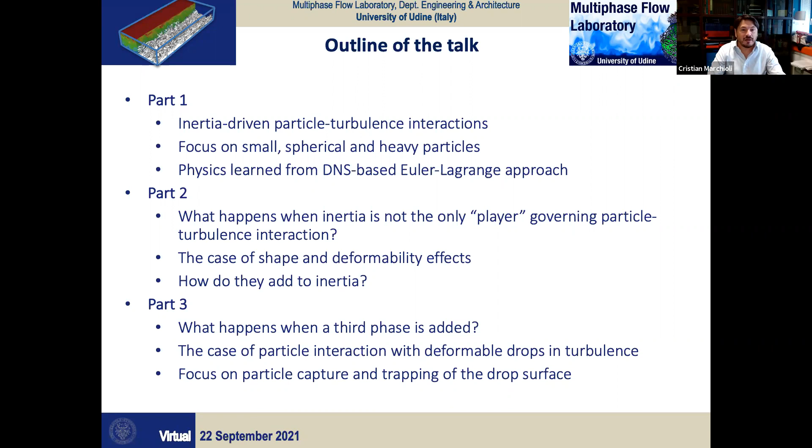Okay, so let's start from part one: physics of inertia-driven particle turbulence interactions. I would like to start by showing you this picture, which you probably know—a very well-known result for those who work on dispersed flows. I'd like to draw your attention to this picture here.

Summer is almost over, but perhaps this picture reminds you of the bottom of a swimming pool on a nice summer day. Unfortunately, it's not like that. This is a snapshot taken from a direct numerical simulation of homogeneous isotropic turbulence.

In this case, the computational domain is a cube that is not bounded by walls, within which you have a turbulent flow. This is just a 2D snapshot taken from this flow in which small particles have been added. Now, in a turbulent flow, we know that there is a wide range of space and time scales.

The smallest scales are the Kolmogorov ones. In this case, the particles that are injected into the flow are significantly smaller than the Kolmogorov scale. This allows what I will present later, the treatment of particles as points. But anyway,

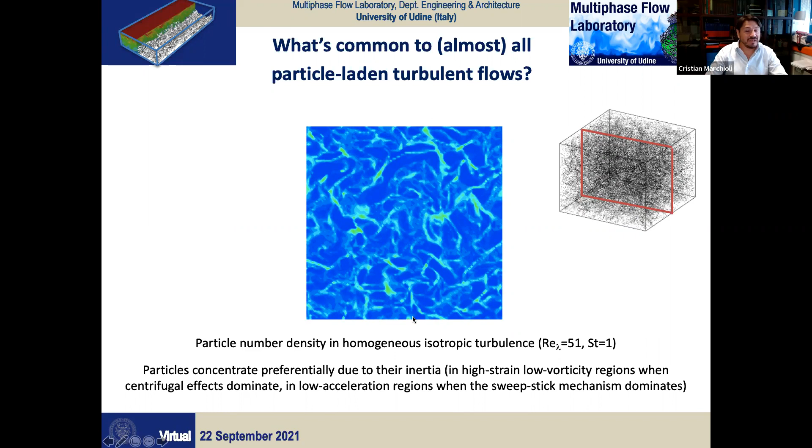Now, in this case, the flow, of course, is a bit more complicated than before because it is bounded by walls. So the wall-normal direction is now non-isotropic and non-homogeneous, all right?

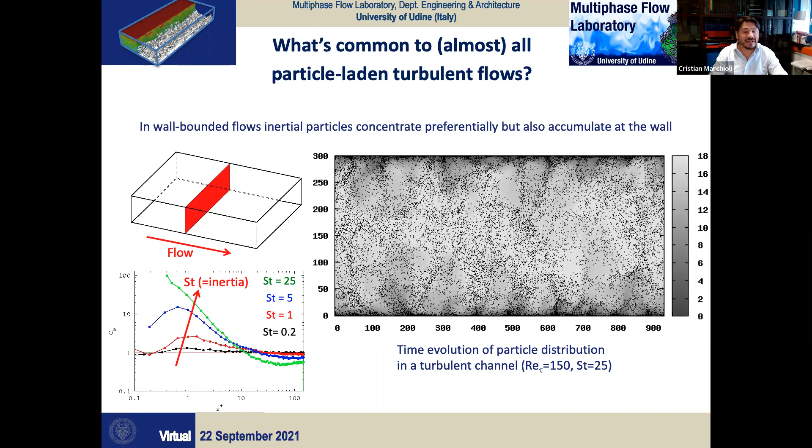Now, without entering too much into detail, we see that there seems to be common macroscopic features that can be identified for particle behavior in the turbulent flow. Now, what is determining this macroscopic behavior more or less in all these kinds of flows?

I could have made more examples, for instance, a particle-laden turbulent jet, and we would have observed the same type of behavior. Well, the simple answer is that in all these flows, particles do not follow precisely the fluid streamlines, but rather deviate from them.

In the examples I've shown you so far, the only source of bias is particle inertia. The effect of particle inertia can be quantified by the particle Stokes number, usually defined as the ratio of the particle relaxation time and some characteristic time scale of the flow. This particle relaxation time is the time it takes for the particle to adapt to any perturbation induced into its motion by the underlying turbulent flow.

Depending on the Stokes number, we can have different kinds of interaction between particles and turbulent structures. If the Stokes number is very small, ideally going to zero, particles have zero inertia and behave as fluid tracers, following streamlines neatly. In this case, one would not observe the non-uniform distribution in space I mentioned before—particles remain uniformly distributed, behaving like an incompressible phase.

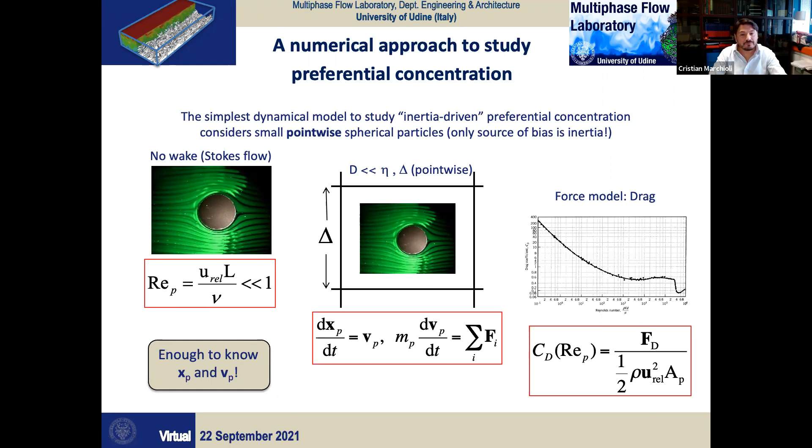For instance, the physics that we can learn can be understood using an Eulerian-Lagrangian approach, as we did. This slide is meant to tell you that our approach solves for the Navier-Stokes equation for turbulence using direct numerical simulation of these equations, coupled with this Lagrangian particle tracking, which I just presented to you.

Another important point is that the results I will show you refer to a case in which the dispersed flow is in the dilute regime. So the particle mass fraction and volume fraction are always considered to be low. In this case, if we stick to this limit, we can neglect the effect of particles on turbulence, and concentrate on the effect turbulence has on particle dispersion. So I will refer mostly to results obtained in the one-way coupling regime, where only the effect of turbulence on particles is taken care of, and the feedback of particles on turbulence is for the time being neglected.

And clearly we can focus a lot on the simplest case of spherical particles, but we also did some simulations with rigid fibers, so something of these kinds of shapes, a prolate ellipsoid rather than a simple sphere. But in general, I will focus on non-spherical particle effects later on.

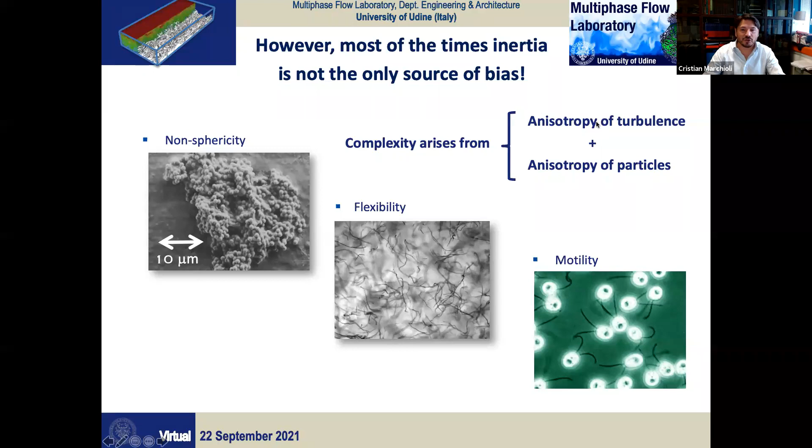Now, that of course makes the situation more complex, because particles are also anisotropic in this case, and this anisotropy adds to that of turbulence. That implies that if we want to still use the dynamical approach and model that I presented, we need to introduce additional functionalities in it.

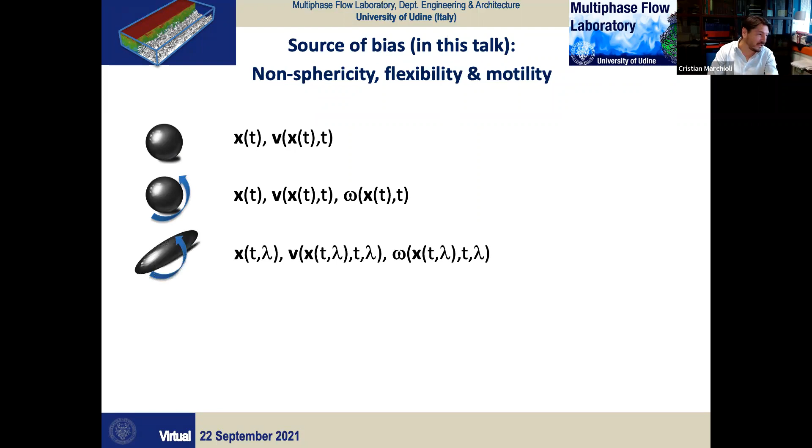Because if we have a small sphere, it is enough to know trajectory and velocity as a function of time. But for some applications, we might be interested also in rotation of the particle, so we need to investigate the rotational dynamics and need an equation for it. If the particle is non-spherical, let's assume this non-sphericity can be represented by just the aspect ratio lambda of the particle, then we need to know all these quantities as a function of the aspect ratio too. There will be an influence.

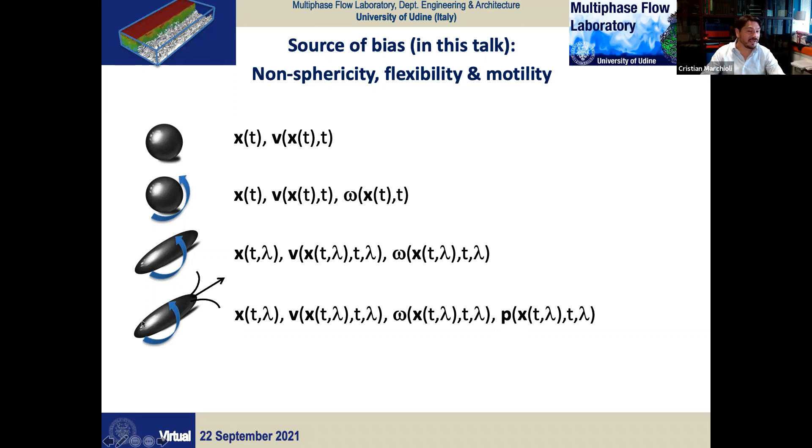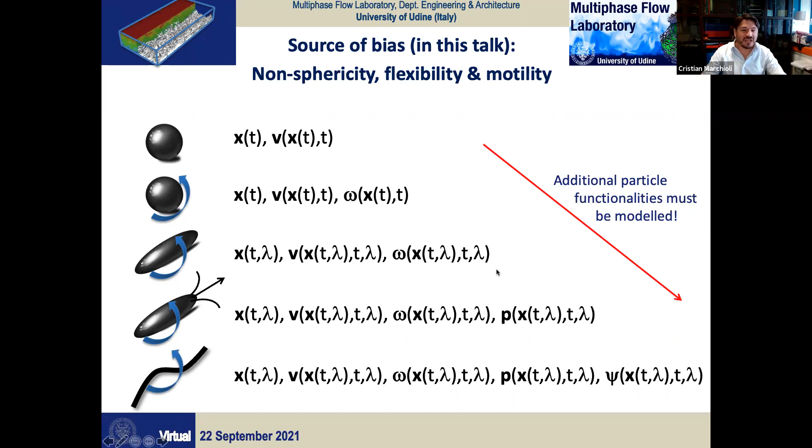In case the particle is non-spherical and maybe also active, so it can move within the flow, we must know also the time behavior of the orientation, indicated by this vector P. So P represents the instantaneous orientation of the particle inside the flow. And if the particle is deformable, then we need additional constraints for the particles. So in general, we need to make our model more and more complex.

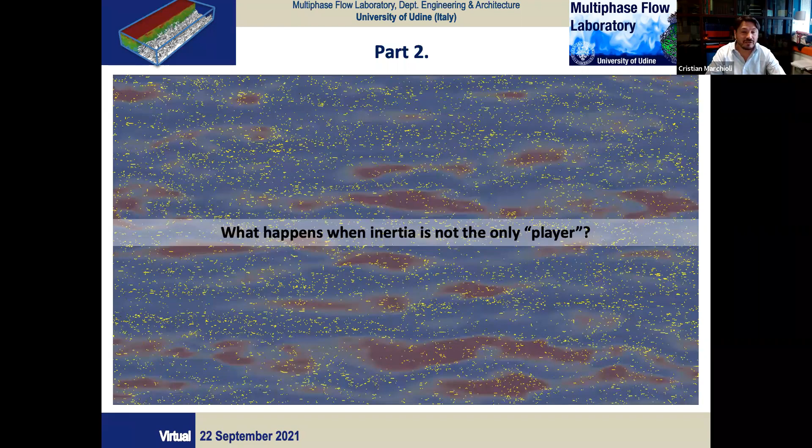Now let's see what happens if we do that, if we complicate the situation. So what happens when inertia is not the only player that determines particle interaction and distribution within turbulence. Now I would like to show you one case which we investigated a few years ago.

This is the work of Diego Dotto, on the dispersion of small flexible fibers in a turbulent channel flow. In this case, fibers are still inertial because they are heavier than the fluid, but they are also non-spherical and flexible, meaning they can deform under the action of turbulence. We wanted to investigate the process of particle dispersion, preferential concentration and wall accumulation in the presence of these additional sources of bias.

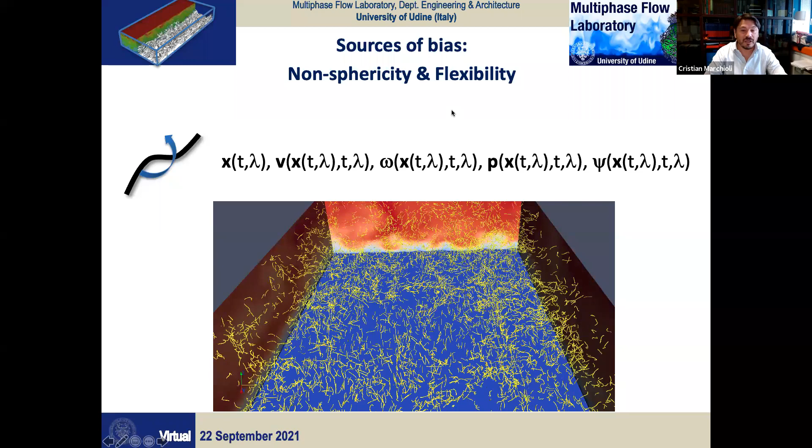The first motivation came from pulp and paper making, because cellulose fibers used for paper and pulp production are clearly non-uniform. But I would say the type of fibers that we have investigated are closer to environmental applications.

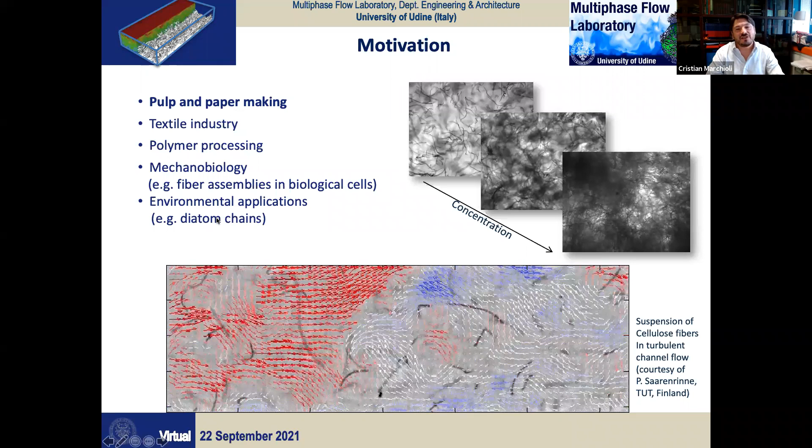The reason for investigating this problem was also related to some methodological aspects, because at that time what people did was either simulate simple rigid, non-deformable fibers in a complex turbulent flow like a turbulent channel, or complex flexible fibers in simple shear flow. Here I'm showing some examples in which the flow is 2D or just characterized by a linear shear.

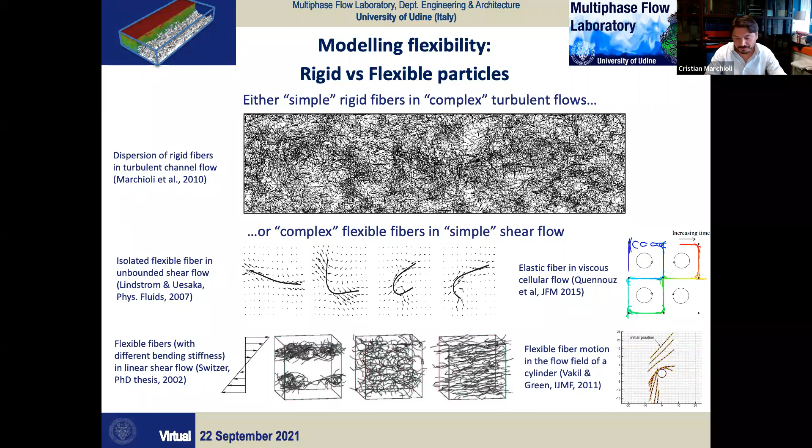So what was missing was the complexity of a flexible fiber coupled with the complexity of a turbulent wall-bounded flow. We decided to tackle this problem, and from the modeling point of view, we built our flexible fiber as a chain of small segments. It could have been spheres too, connected by ball and socket joints. This is the so-called bead model, applied many times in the literature.

Here I'm providing some reference papers in which this method has been applied for the first time. The main point is that we can decompose our fiber into many small segments, or spheres, and for each of these segments we can solve Euler's first and second law.

This is exactly the equation I showed you before, the force balance, in which, in addition to the drag force acting on the individual element of the fiber, we need to take into account the constraint forces, which I indicate here as X, induced on our element by the neighboring ones through the constraints. And of course we need an equation for the rotation of each of these elements.

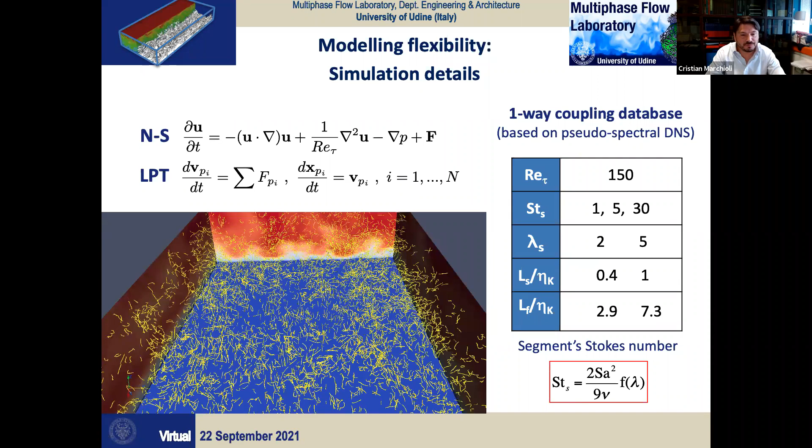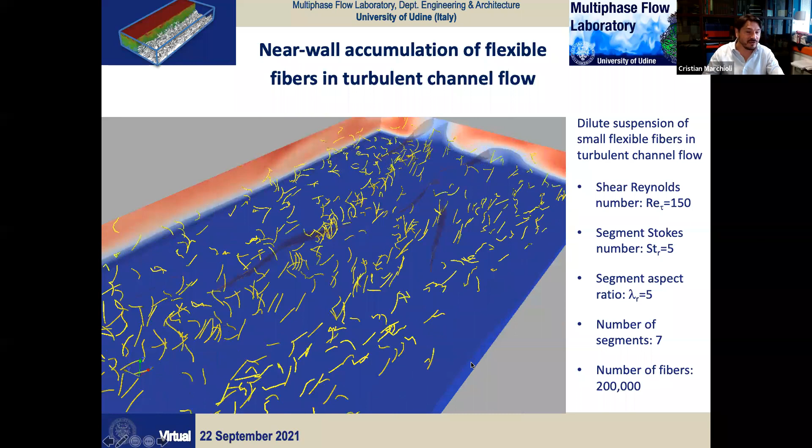This is a close-up view of what our flexible fibers do when they are in the near-wall region. So this is only a portion of our channel, and now this is a close-up view showing the type of behavior that our flexible fibers have, in particular when they are close to the wall. As you can imagine, the fibers will accumulate at the wall, and this is a sort of animation of this near wall accumulation.

Now, this is showing you the whole channel. So this is the entire channel seen from above, if you want, from the normal direction.

This is the actual length of our flexible fibers compared to the entire computational domain, so you can appreciate the zoom that we did before. This is the actual size of the fiber, so you can probably see nothing here.

But perhaps you notice that there is a sort of correlation between the position of the fibers which are entrapped at the wall and the near wall distribution of the fluid velocity, which is the color map that you see. In red, you see high streamwise fluid velocity regions, the so-called high-speed streaks. In blue, you see the low streamwise fluid velocity regions, called low-speed streaks.

So you can probably notice, for instance, here that the fibers tend to accumulate in low-speed streaks. This is a feature that has been observed also in the case of spherical particles. So even if our particles are non-spherical and flexible, this kind of behavior is kept.

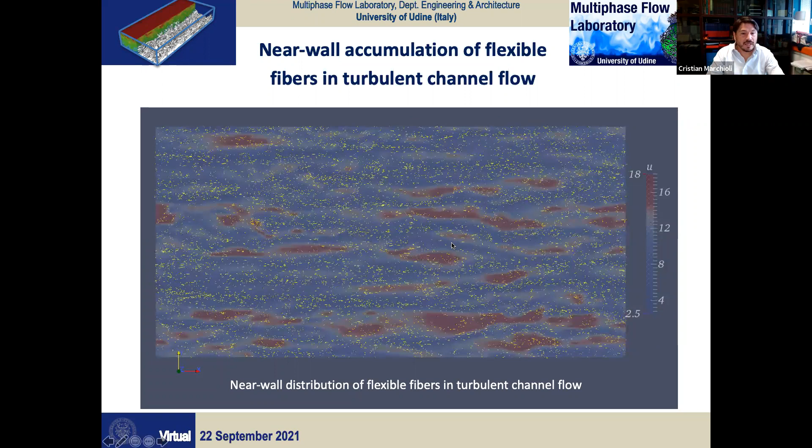So the two sets start from the same initial condition, same spatial distribution. One doesn't deform, the other deforms in time.

And as you can see, in the case of rigid fibers, we have a higher peak, which is still in the viscous sublayer. So you see that this tendency of accumulation to the wall is shared with the small spherical particles. However, the peak in the case of flexible fibers is smaller, and you can see also that to a certain extent, flexibility allows fibers to be captured in a very tiny region, more or less 1.5 wall units away from the wall. So these are really close to the wall.

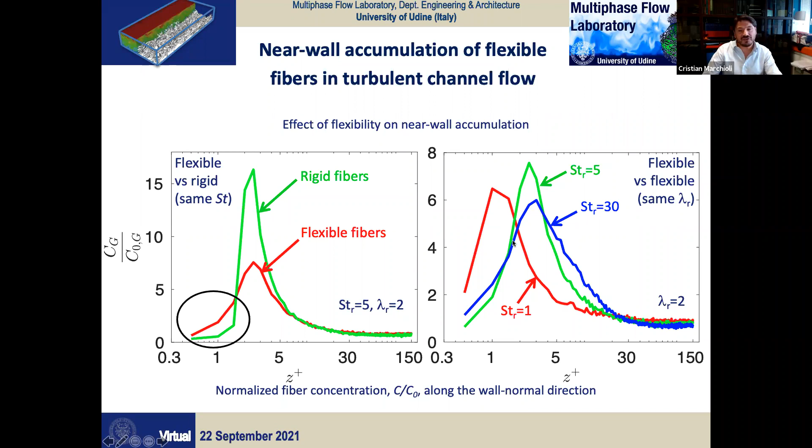You see that for the case in which the Stokes number is low, we have a peak that is quite close to the wall. But as we increase the Stokes number, the peak tends to shift away from the wall. Still, the qualitative features of the concentration profiles remain the same.

And we have been exploring also particle deformation, of course, not just their distribution inside the domain. For the sake of time, I will focus only on this result here, and skip the next slides in order to move to part 3.

Now, what you see here is the PDF of the solid angle alpha. Alpha measures the relative orientation of one segment in the fiber chain compared to the neighboring segment. If two neighboring segments are perfectly aligned in three-dimensional space, then alpha is 0. A fully stretched fiber in which all segments are perfectly aligned would have alpha equal to 0 for all segment pairs. If there is some relative orientation between neighboring segments, then alpha is not 0.

So what you see here is the ensemble average value of alpha, and the PDF is what is shown. The ensemble average is obtained by computing alpha for each segment pair in each fiber. Then we average alpha for a given fiber, and then we average over all the fibers that we consider. I hope it's clear. Now, in the plot, you see four different curves, four different PDFs.

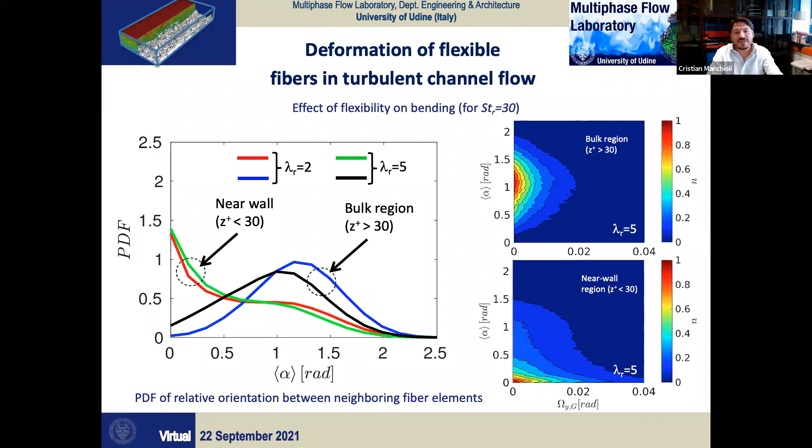Now, because it's already 42 minutes, let me skip this. These are just a few conclusions for this part.

There are developments, of course, which have to do with the introduction of force coupling effects, which we have been neglecting. So there is no modulation of turbulence by fibers in the results I've shown you. Include full mechanical coupling, so not just force coupling, but also torque coupling. And that would allow us to study, for instance, the possibility of inducing drag reduction in the flow.

Accounting for bending stiffness, which was not included in our simulations. So the fibers just bend and deform freely, so to say, in response to turbulence. There is no preferred conformation of the fiber in terms of energy. So any configuration, every type of deformation for the fibers, is the same.

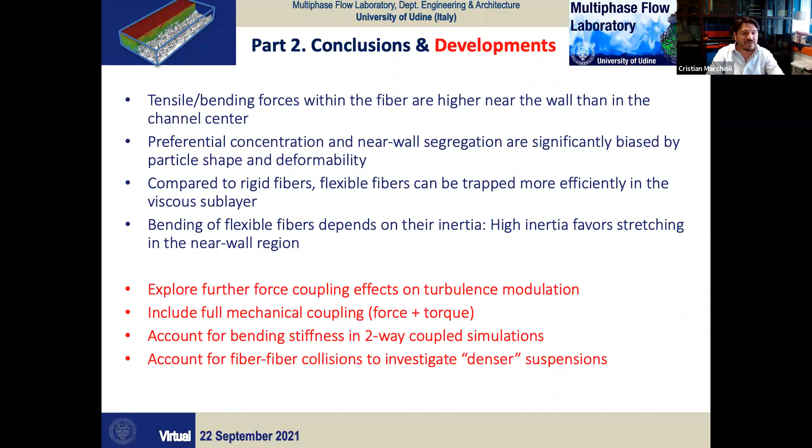And of course, it would be interesting to account for fiber-fiber collisions to investigate denser suspensions. But anyway, the idea was to start with something simple. Now let's move to part 3 quickly.

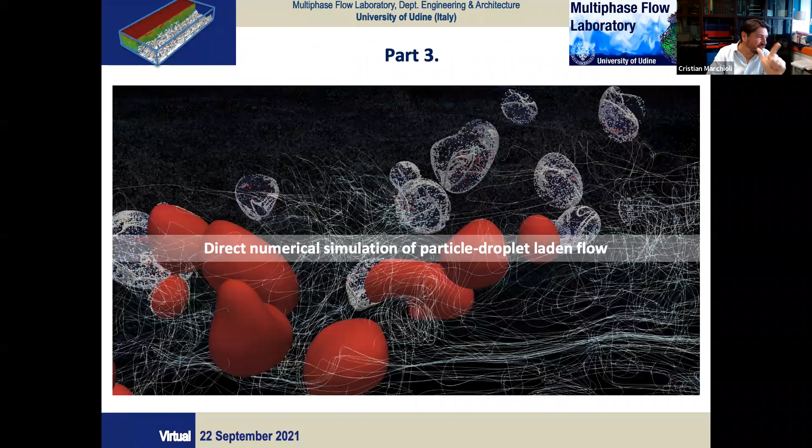In this case, I would like to tell you a little bit about direct numerical simulation of particle droplet-laden flow. Here we have three phases, not two anymore. In addition to the fluid and the particles, we also have the deformable droplets I mentioned before.

The long-term motivation for this study is to investigate the change in the deformation of the drops that can be induced by particles trapped on the surface of the drops. This is analogous to what happens when drops are laden with a surfactant. If you put some surfactant on the surface of the drop, you will find a local change in the deformation of the drop. This is what happens in this case.

You will have hydrodynamic shear stresses acting on the surface, represented here. These shear stresses will drive the surfactant and produce a non-uniform concentration of surfactant, such as this distribution on the drop I'm showing you. We will have regions of low surfactant concentration corresponding to high surface tension values, and regions of high surfactant concentration corresponding to locally low surface tension. This produces a local difference in the deformability of the droplet.

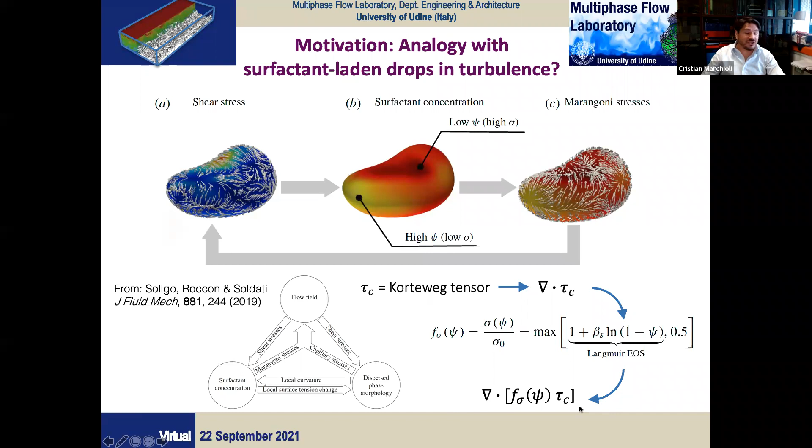What we are doing now is not yet looking at the effect of the local concentration of particles, so we are not yet considering changes in the distribution of the particles. Instead we consider this simplified case in which we have turbulence, large droplets, and particles.

These are all the interactions among the three phases. Turbulence deforms particles and droplets through shear stresses, but droplets in turn feed back on turbulence through the capillary, or Korteweg, stresses mentioned before. Particles, being slightly inertial, are brought about by turbulence through the so-called turbophoresis, and in principle they could also exchange momentum with the fluid.

If particles are interacting with droplets, they will respond to the local changes in the curvature of the droplets, and as I said, they might also induce local changes in surface tension.

In what I'm going to present, I will skip a few slides and show you what happens if we neglect the momentum exchange from the particles to the turbulence, and if we just consider a constant value of the surface tension.

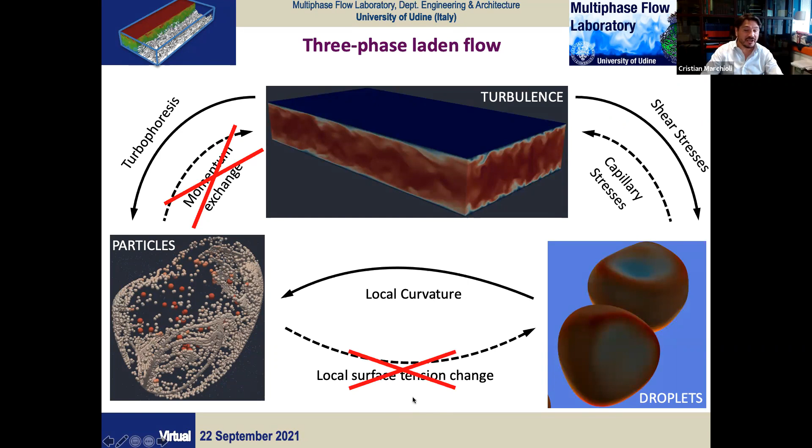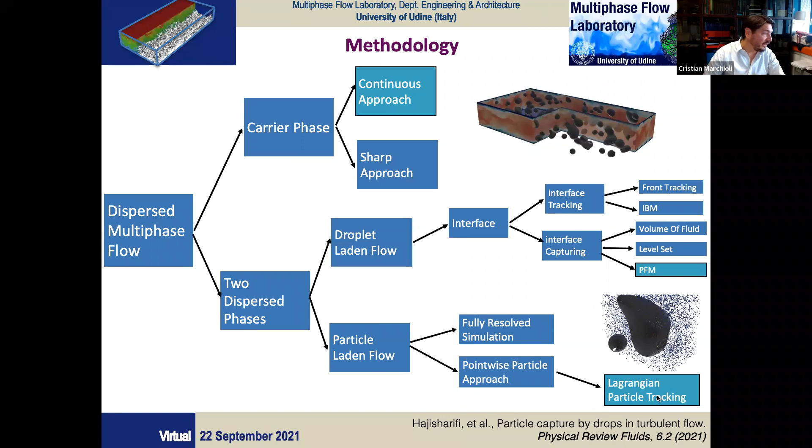The methodology we use is based again on an Euler-Lagrange approach: a continuous approach for the carrier phase, out of the whole zoo of methods you can use. For the dispersed phases, in particular the drops, we use the phase field method, which is an interface capturing method. For the particles, we still use the Lagrangian particle tracking approach I told you before.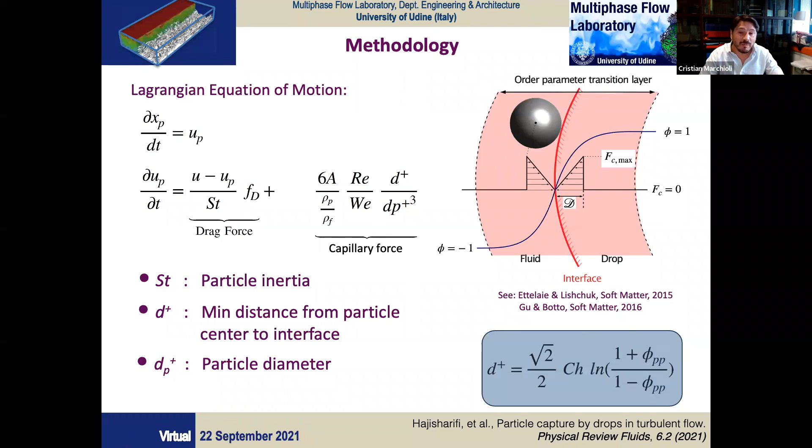Whenever a particle touches the interface, it is subject to the action of this capillary force. The force is activated whenever the particle crosses the surface for the first time, and in our model it is then considered as captured. The force then always acts to retain the particle at the surface, trying to keep it from escaping. The particle may only escape if a strong turbulent event is occurring.

These are the conditions we have considered for our simulations. In particular, we are considering different values of the Weber number, which in this case represents the change in the deformability of the drop. We are also considering different values of the Stokes number, but it is kept low in all the sets, so our particles are always weakly inertial.

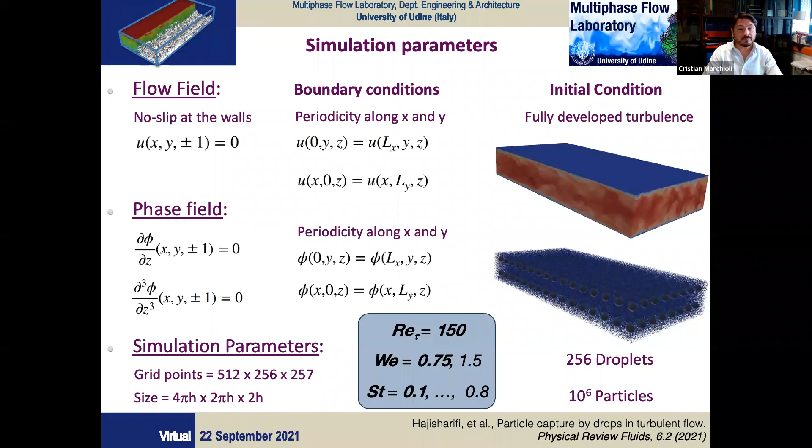Now I will show you a couple more slides to tell you what kind of physical knowledge we can learn from these simulations, since I see I've already taken too much of your time.

About particle capture, we observe that particles are captured in specific regions of the surface of the drop. Looking at the particle scale, particles are typically led and brought towards the surface of the drop by coherent local jets of fluid impinging on the surface. The particles just follow these jets and reach the surface, and once there, they are retained through the capillary force that the surface can exert.

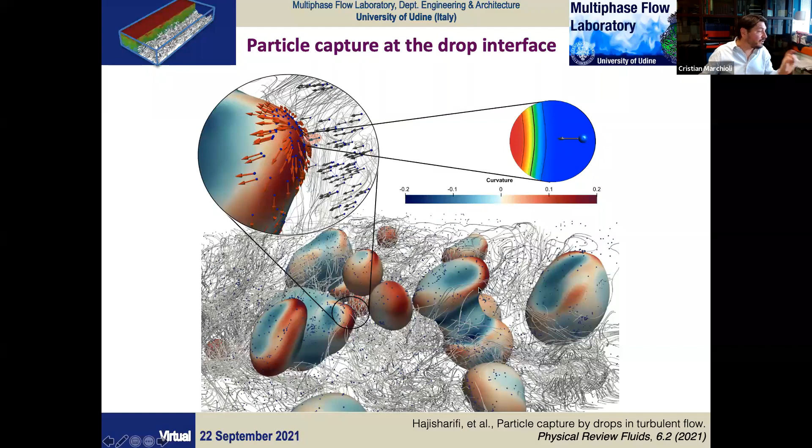As you can see from this zoom in, these are a bunch of droplets inside our flow. Once they are trapped at the surface, they tend to move away from these regions and disperse on the surface of the drop. You can see that our droplets can deform a lot under the action of turbulence, and this has an effect on the distribution that the particles can attain.

Let me skip this one. Now, in order to investigate the trapping process, so what happens to the particle once it has been captured, we decided it was necessary to include what we called the excluded volume effects.

So particles, in the simplest approach that I mentioned, in the absence of any collision, can overlap. They are allowed to overlap. If you do nothing in your model, they can occupy the same region in the domain.

In our case, if we don't include particle collisions, so if we do not prevent particles from overlapping, then we can find very densely concentrated clusters that have the form of a filament, as you can see here, which are actually not physically plausible.

Instead, if we include collisions, so if we include excluded volume effects, particles must not occupy the same region in the flow and in particular on the surface. Then we find clusters still more or less in the same regions of the drop, but clearly these are more smeared out, occupying a wider portion of the surface.

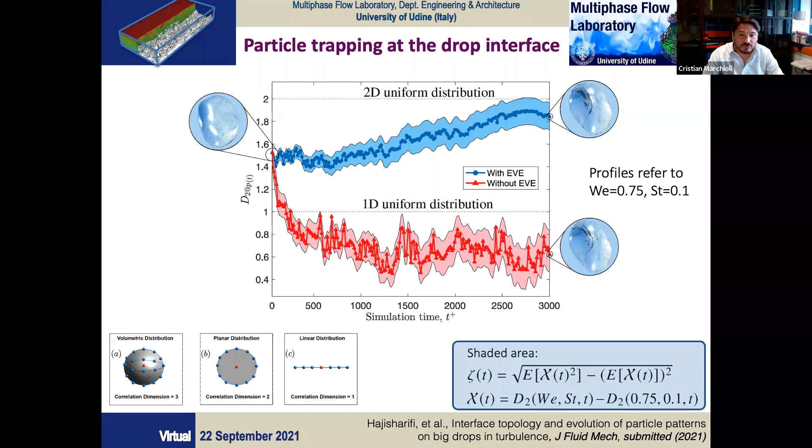Now this has clearly an effect, and I would like to move to the last slide and then finish. What you see here is a PDF of the curvature sampled by the particles that are trapped on the surface of the drop. This kappa at p is the curvature of the drop interface sampled by a trapped particle.

Here we are normalizing this curvature by its mean value. In this plot, values of this ratio larger than 1 mean curvature higher than the mean, smaller than 1 means curvature smaller than the mean. Positive or negative values relate to concave or convex regions on the surface.

Now let's look at the main plot. This is the PDF of this curvature in red for the case in which no excluded volume effects have been accounted for, so there are no collisions and particles can overlap.

You can see that in this simplified but yet non-physical case, there is a clear peak of the PDF for values of the normalized curvature equal to about 2. So these particles tend to form clusters in regions where curvature is positive and generally higher than the mean, and the PDF is narrower.

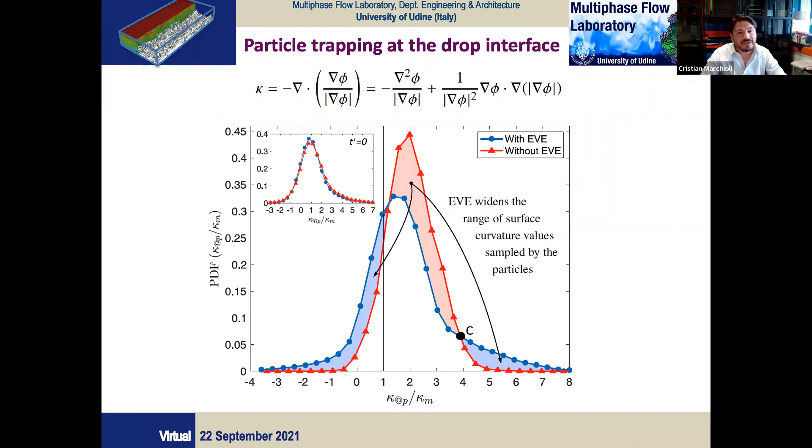So with the conclusions for part 3, I thank you very much for your attention. I'm sorry for taking a lot of time, but I was expecting this because I know myself, so apologies for that. And if you have any questions, I will be happy to answer. So thanks a lot.